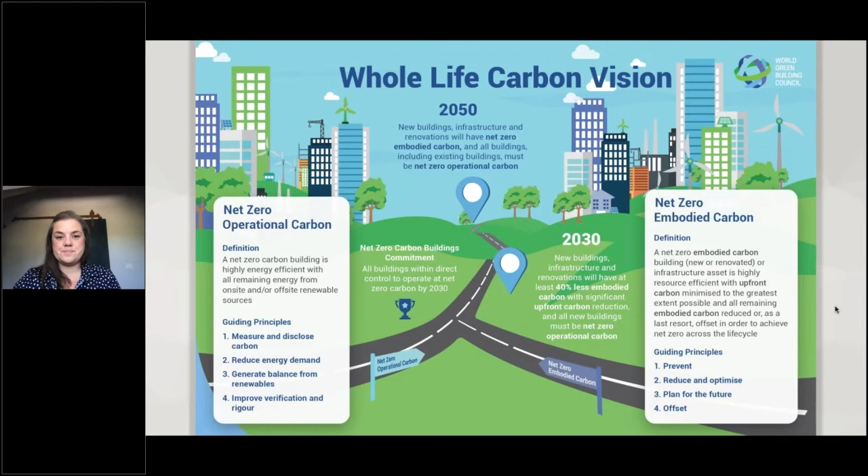Around the world, our green building councils are developing different tools, programs, and resources to help respond to this challenge, taking that framework and its guiding principles and vision and applying it in a way that's relevant to a particular market context in terms of the types of initiatives, metrics, target areas, and terminology used.

For example, in the Netherlands there's this concept of Paris Proof, where organizations can ensure their buildings are fit for purpose, future-proofed against future climate scenarios in line with the Paris Agreement reduction targets. There's also LEED Zero from the US Green Building Council, which recognizes a balance of net zero in energy and carbon.

In Singapore, where it's really difficult to achieve all your renewable energy needs on site through solar panels, or procure off-site due to lack of availability and land space, they're approaching it through a super low energy concept, which means reducing the amount of energy consumed by the building as much as possible.

In other markets, they're also taking a whole life carbon approach, such as the UK GBC with their net zero carbon buildings framework, ensuring targets and standards for reducing embodied carbon. Similarly, DGNB from Germany has a climate positive certification program, which requires buildings to set a roadmap for achieving net zero for all associated emissions.

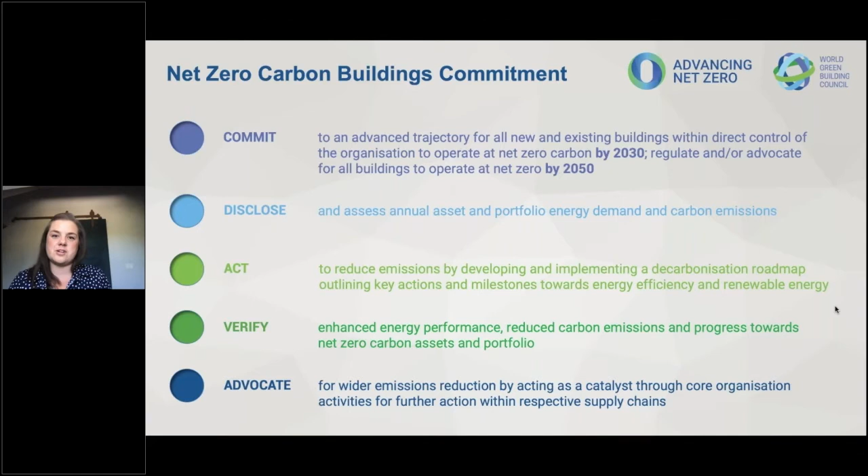We currently have 100 signatories to the commitment, with more being announced this week, and we have detailed guidance available on our website for those interested in signing up. Each organisation and government that signs up creates an action plan setting out the intention to achieve the different components I just set out. We use the Green Building Council network, their rating tools and guidance documents, to help and support signatories in achieving their commitment goals.

I've mentioned embodied carbon briefly, and I want to carry on with a quick mention about why that's important. Globally, buildings are responsible for 39% of carbon emissions, broken into 28% for building operations, the use of buildings, and 11% from the construction industry for the materials and construction processes in creating and maintaining those buildings.

Building operations are split into the residential and commercial sector, and also into direct emissions created on site through on-site combustion, for example, and indirect emissions from use of electricity from the grid.

That 11% from the construction industry is actually fairly small when considered against the total amount of emissions from the concrete, steel, and aluminium sectors, which are over 22.7% of emissions on their own. That's broken down into roughly 11% for concrete, 10% for steel, and 1.5% for aluminium.

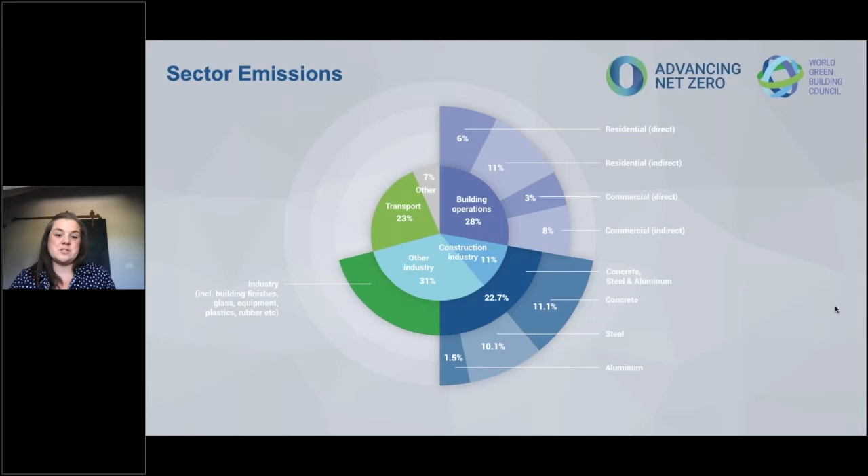Therefore, if we, as the building and construction sector, an enormous procurer of these materials, can help create demand for low carbon alternatives, then we can have a much greater impact on global carbon emissions than just the 39% our sector is already responsible for. We will be introducing a whole life carbon commitment pathway to the commitment later this year.

This week we're celebrating World Green Building Week with its theme, Act on Climate, through advancing net zero buildings. We're highlighting the action already being taken by businesses and governments around the world in advancing net zero buildings, and why net zero buildings are important for communities, for the planet, and for economies.

It is time to tackle the climate crisis, to rise to the challenge, to overcome the hurdles for a more resilient tomorrow, and net zero buildings are the solution. So this World Green Building Week, learn how we can take action across our sector, share the message about net zero buildings.

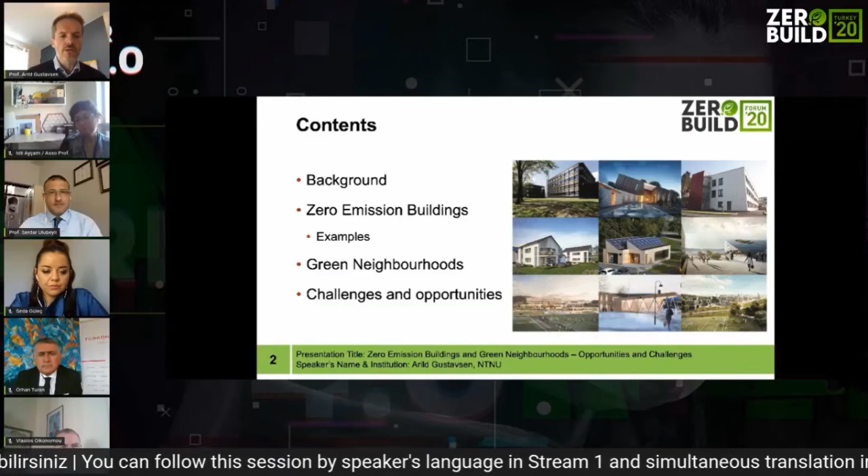The contents of my presentation: first I will give a bit of background, which partly has already been introduced. I will talk about the work we have been doing on zero emission buildings and give a couple of examples, then touch upon green neighborhood concepts and give some examples on those, and then end with some thoughts on challenges and opportunities.

So why do we work on zero emission buildings and zero emission neighborhoods? As presented earlier, we know that the buildings and building construction sectors combined are responsible for 36% of the global final energy consumption and nearly 40% of the total direct and indirect CO2 emissions. The emission numbers vary a bit from source to source, but if you include upstream energy and material production, it can be quite a substantial number anyway.

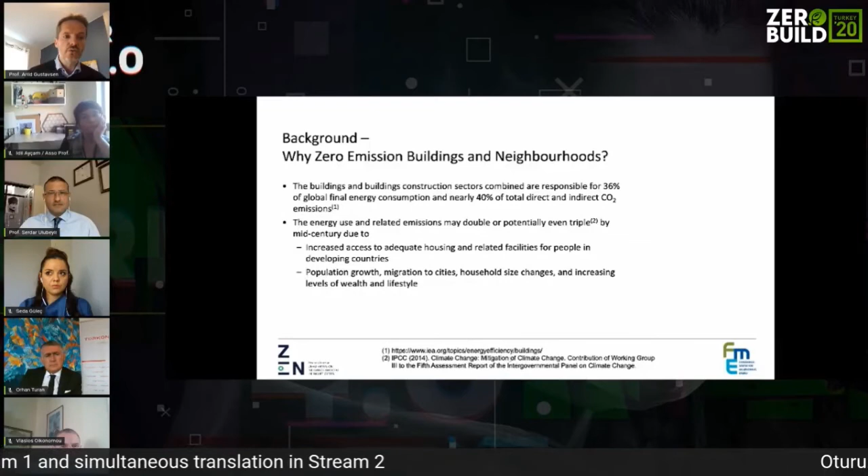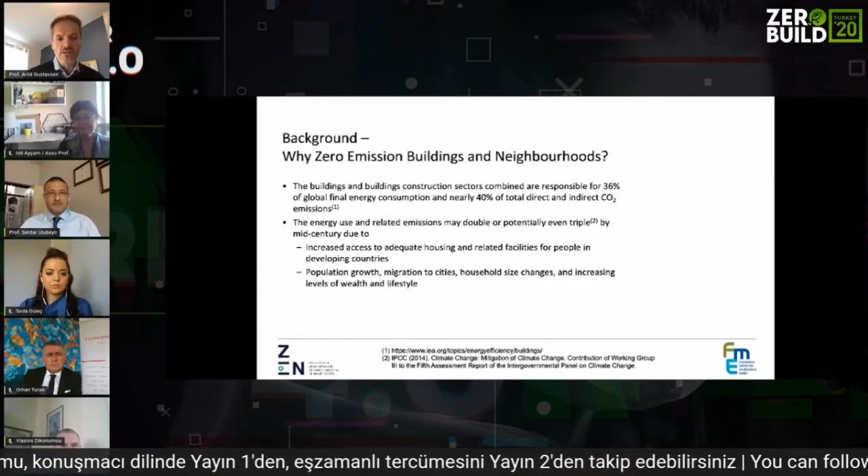We know the current numbers, but looking at the future, the energy use and related emissions may double or potentially even triple by mid-century. This is due to increased access to adequate housing and related facilities for people in developing countries, due to population growth, migration to cities, household size changes, and increasing levels of wealth and lifestyles.

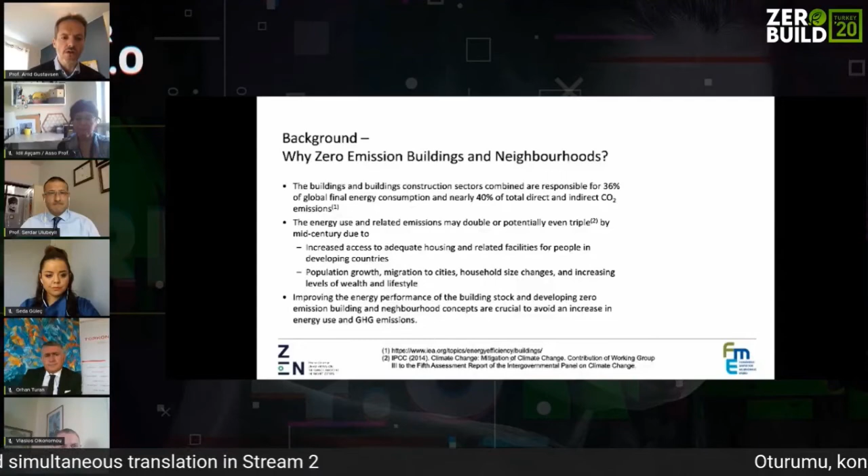So improving the energy performance of the building stock and developing zero-emission building concepts and zero-emission neighborhood concepts are very important to avoid an increase in energy use and greenhouse gas emissions. This, of course, also relates a lot to the UN sustainability goals, and I think several of those are relevant in this regard.

For instance, affordable and clean energy for all. When you aim for a zero energy concept and zero emission concept, we know that we need to invest in renewable energy production, usually close to the building or on the building site or on the building itself.

We also touch upon sustainable cities and communities. A lot of the buildings we have are in cities, and there will also be an increase in the number of people living in cities. We need to increase the number of built houses in a sustainable way.

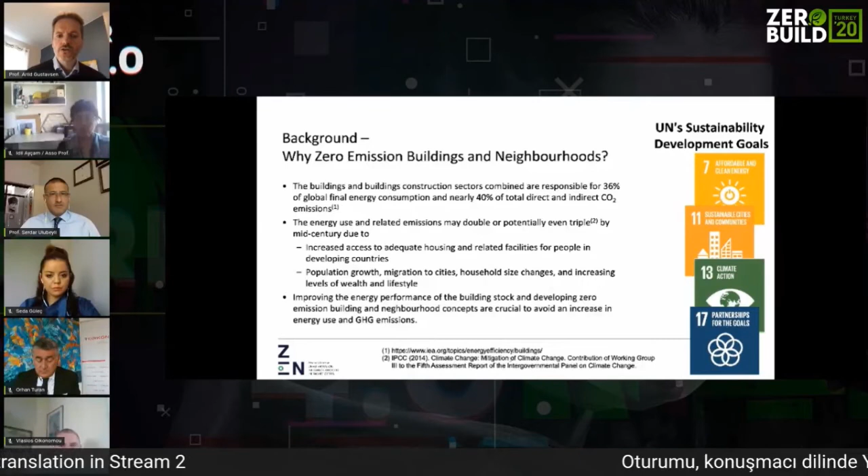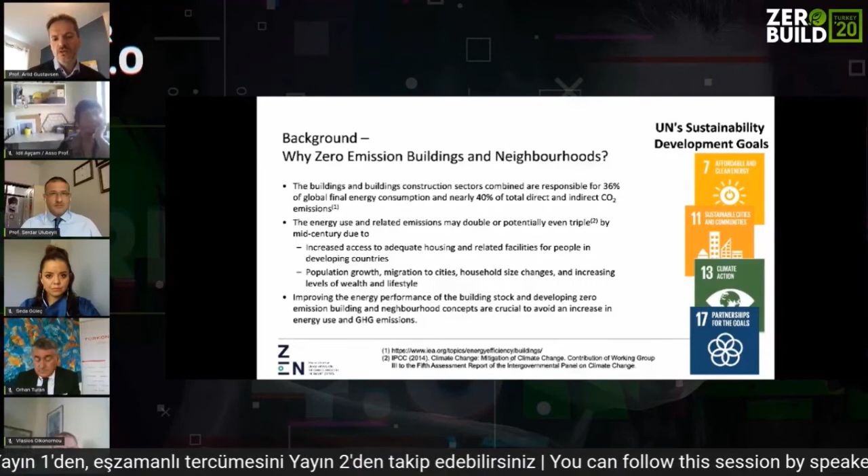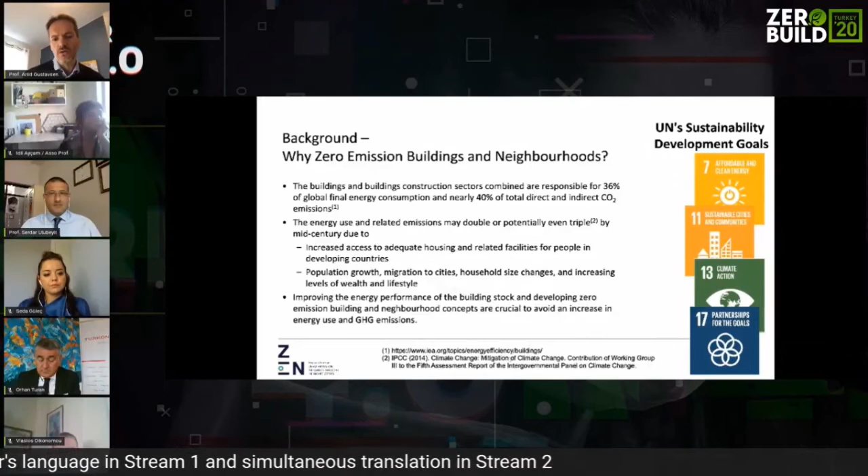And of course, climate action, this connection is very clear, and also partnerships for the goals. Making one building includes partnerships across different disciplines, but making zero-emission neighborhoods or a sustainable city touches upon very many areas like municipalities, consultants, the building sector, the energy sectors. You need collaboration for all these actors to make sure we arrive at this wanted environmental ambition.

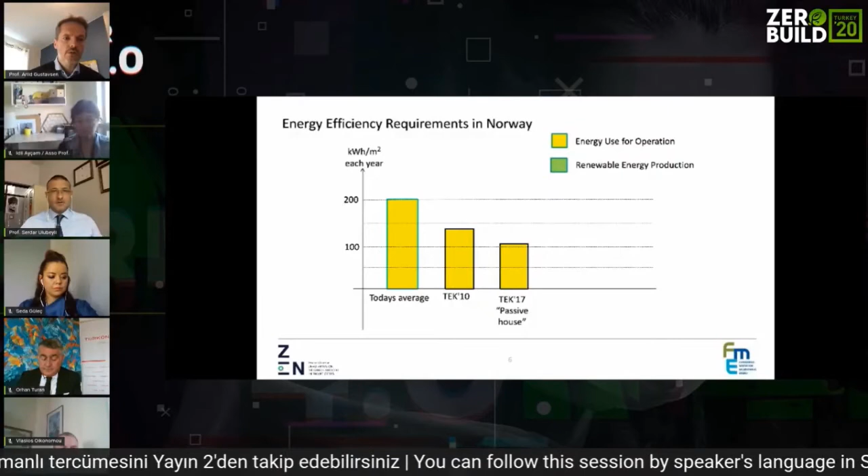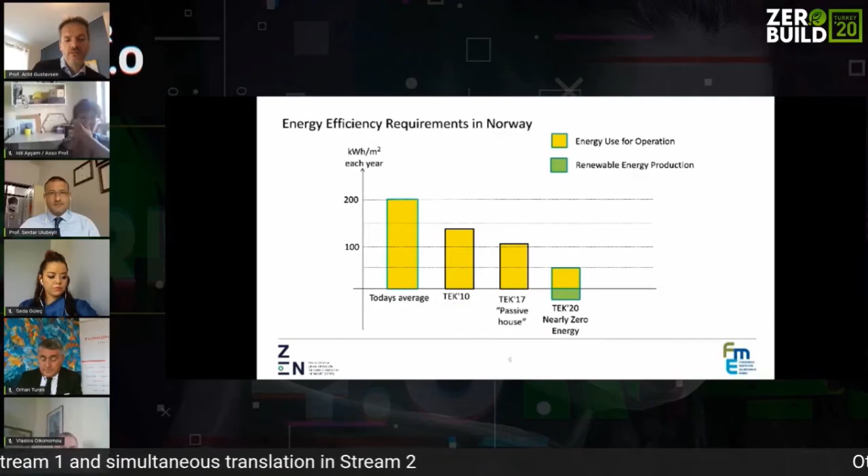Looking at what is going on in Norway, we see that today's average energy use in buildings is around 200 kilowatt hours per square meter each year. In the technical regulation in 2010, it aimed for below 150 kilowatt hours per square meter per year, and in 2017 we introduced what is called passive house level, close to 100 kilowatt hours per square meter per year. In 2020, which is now coming to an end soon, we will have the nearly zero energy ambition level pointed to by the European Commission.

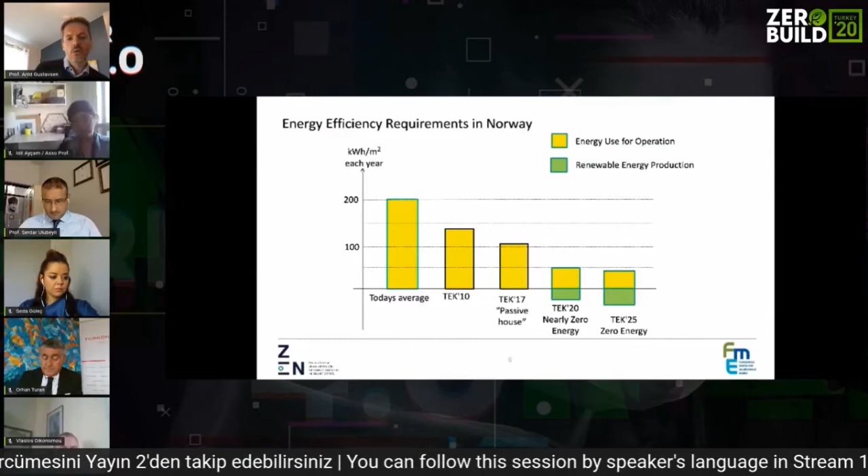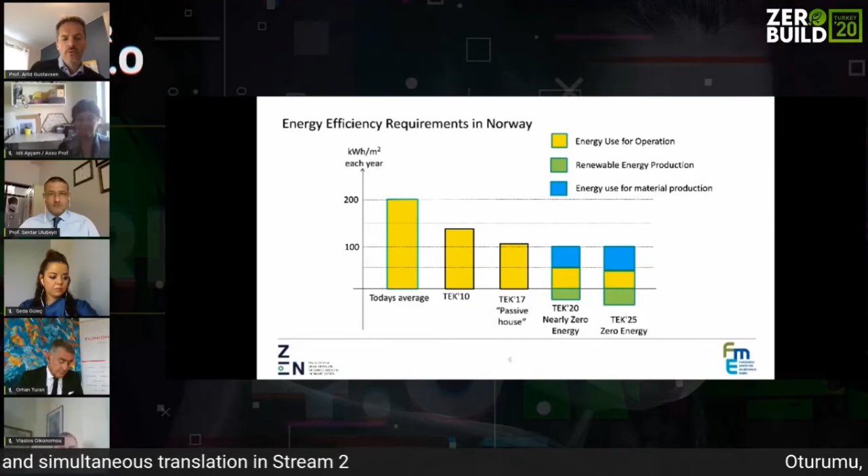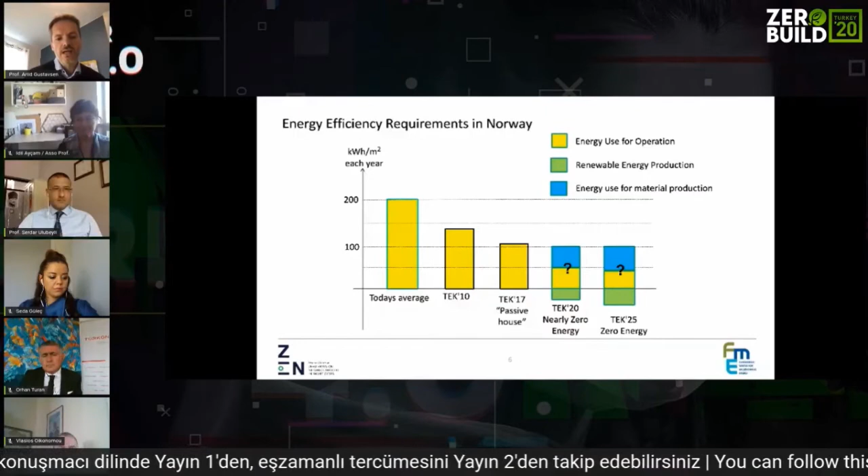Maybe in 2025, we might end up with a zero energy ambition level. But so far, most of these requirements, at least in Norway, have been on the energy use and usually only on the operational energy use. If you look at the energy use going into making the materials, the picture might be a bit different. Still, at least in Norway, it remains to be seen what exactly this definition will be, also for this year, actually.

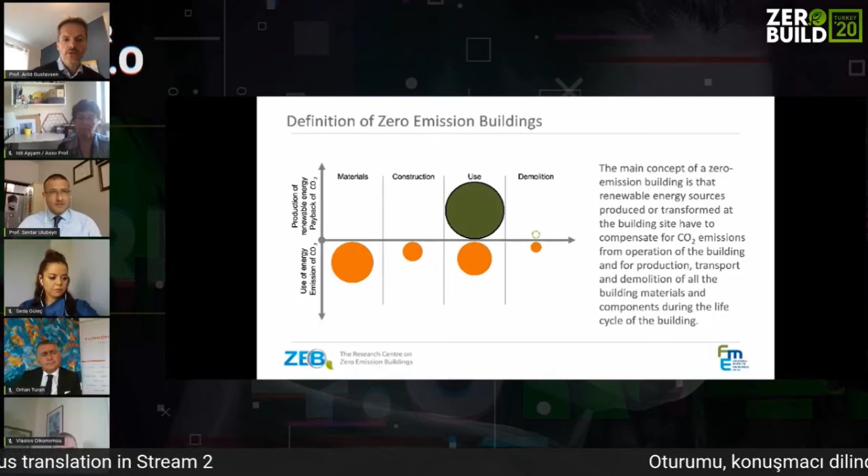Since we also think that the embodied emissions, the energy use, and the emissions going into making the materials and constructing the building are just as important, we have been working on the zero-emission building concept. The main concept is that renewable energy sources produced or transformed at the building site have to compensate for CO2 emissions from operation of the building and for production, transport, and demolition of all the building materials and components during the life cycle. So we need renewable energy production to compensate for all the emissions.

That then means emissions related to materials, construction, the use phase, and also the demolition phase. For energy efficient buildings with renewable energy production integrated, like PV, we often see that the material emissions are of the same magnitude as the operational emissions.

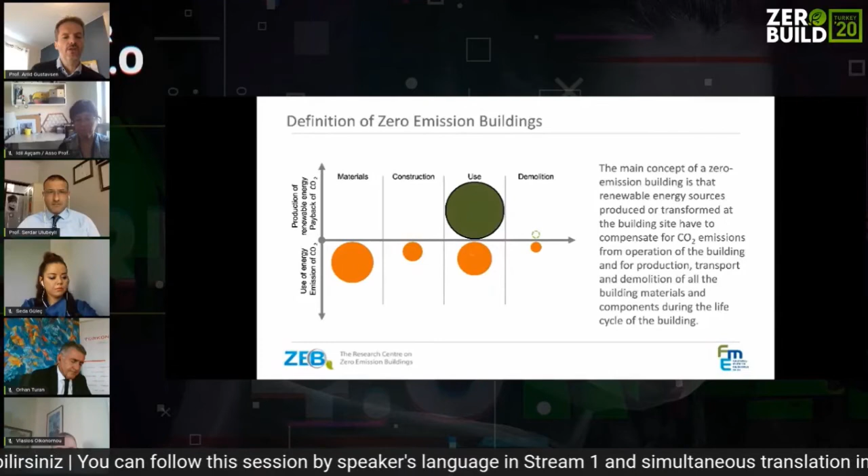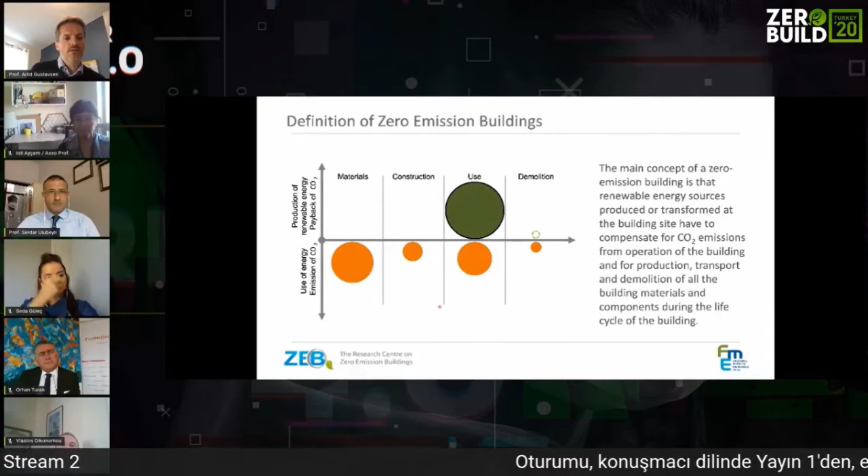Material energy use is on the same magnitude as the energy used for operation. So looking at the whole life cycle becomes really important, to make sure we also work on the material side and the construction side, in addition to the operational side.

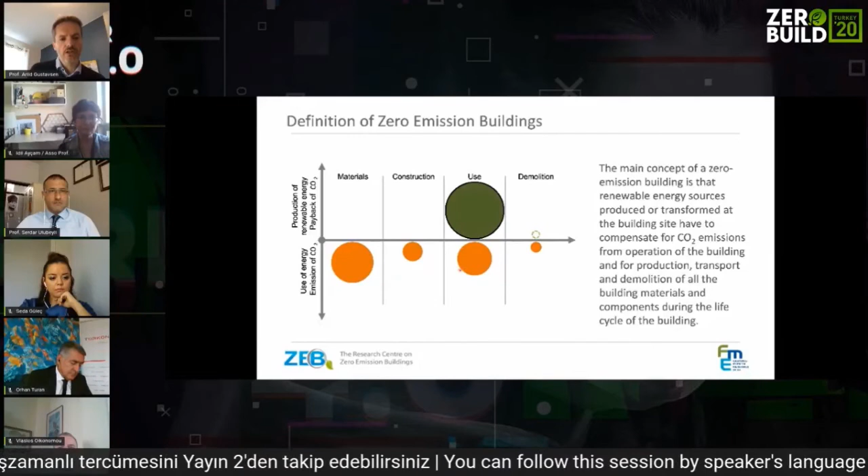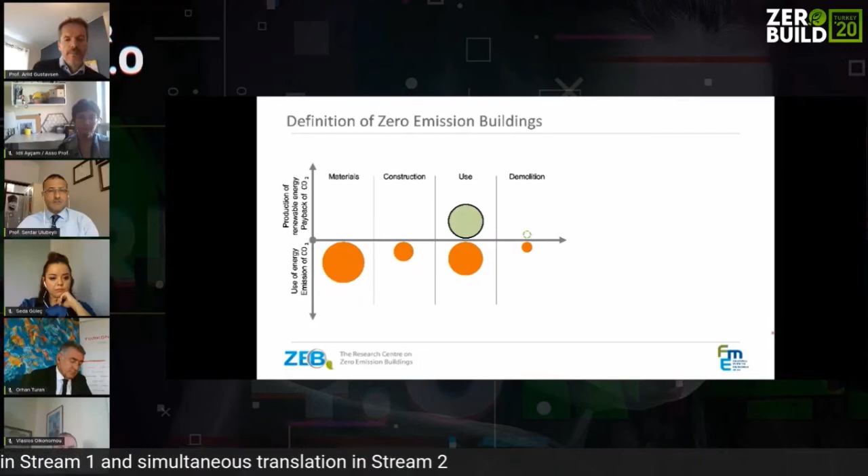So we have developed different ambition levels. This is showing one of those. We have different ambition levels depending on how much renewable energy production we can have on the building. What is shown here is the zero emission building in operation, where we have renewable energy production of the same magnitude as we need for operation of the building.

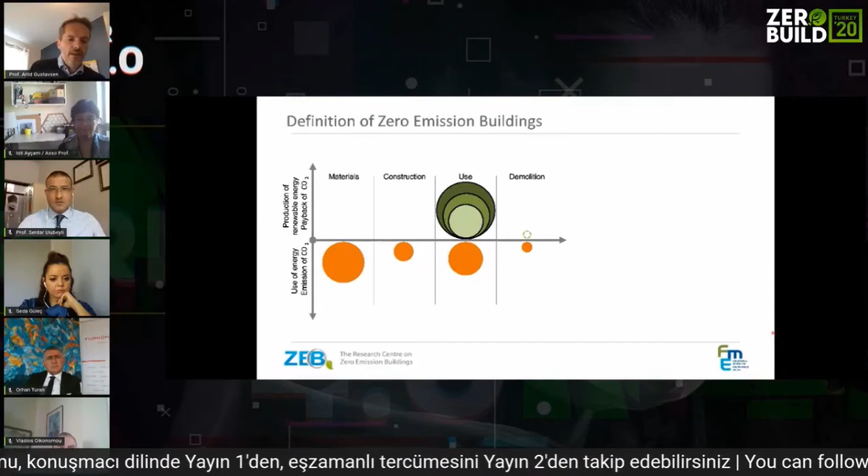If we are able to include more renewable energy production on the building or on the building site, we can have a more ambitious requirement for the building. The ultimate aim is to have renewable energy production compensating for all the emissions related to the whole life cycle, and also taking into account maintenance of the building.

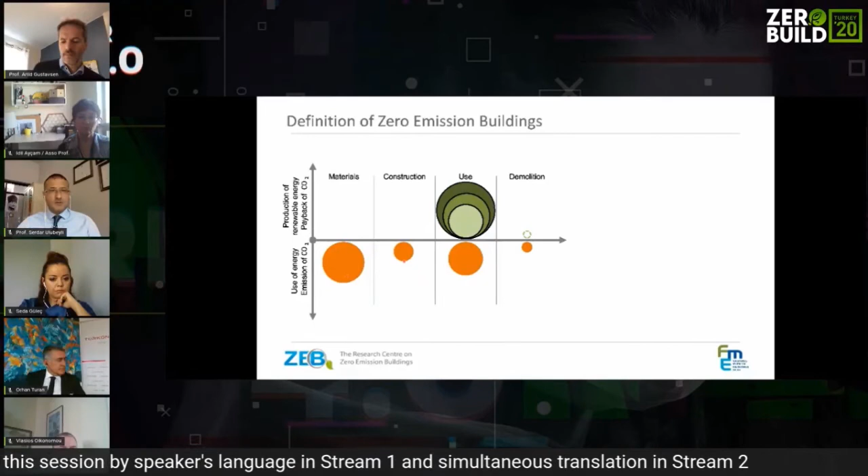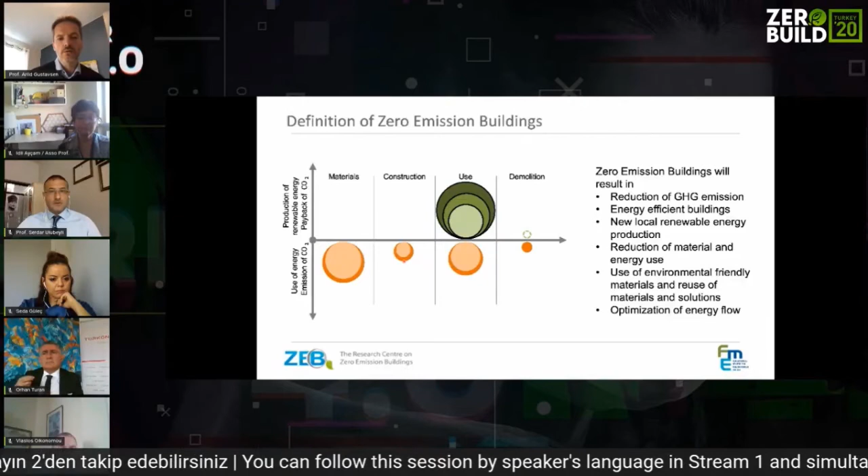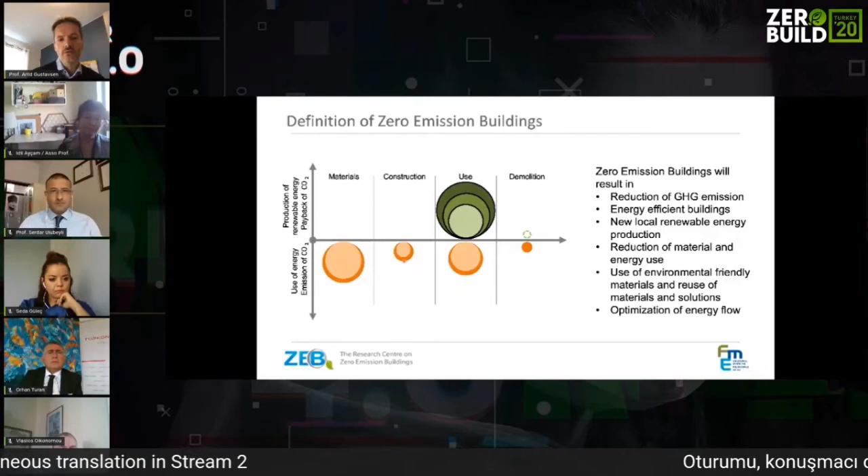So if you use this zero emission building definition, we will have a reduction of greenhouse gas emissions. We will have energy efficient buildings. We will have new local renewable energy production on the buildings or nearby the buildings. We will have reduction of material and energy use, and also promote the use of environmentally friendly materials and the reuse of materials and solutions, and optimization of energy flows.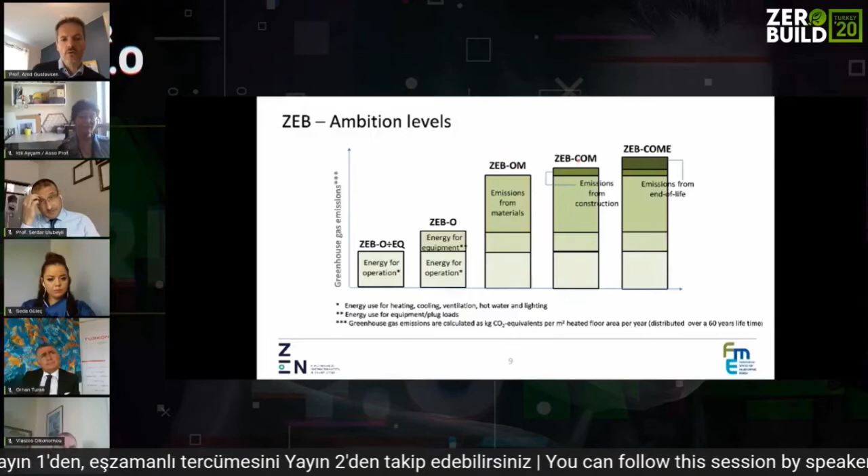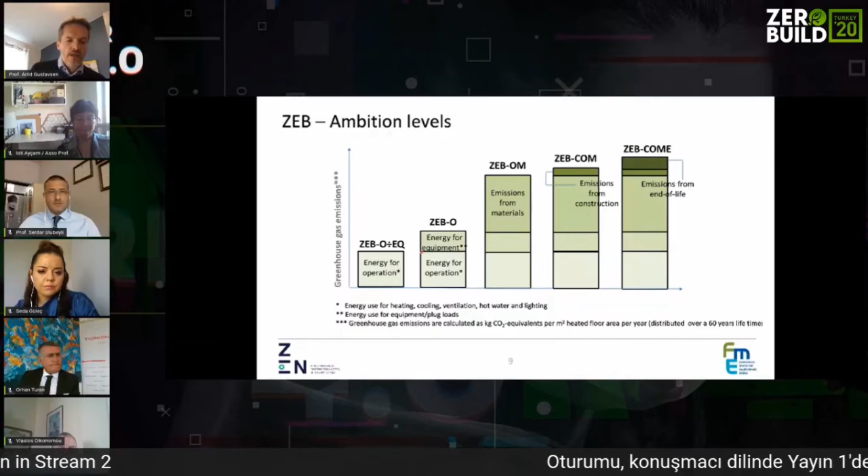COM is zero emission buildings with construction, operation, and materials. COME is zero emission buildings with construction, operation, materials, and end of life. The easiest or lowest level is what we call zero emission building in operation, but without the plug loads or the user equipment.

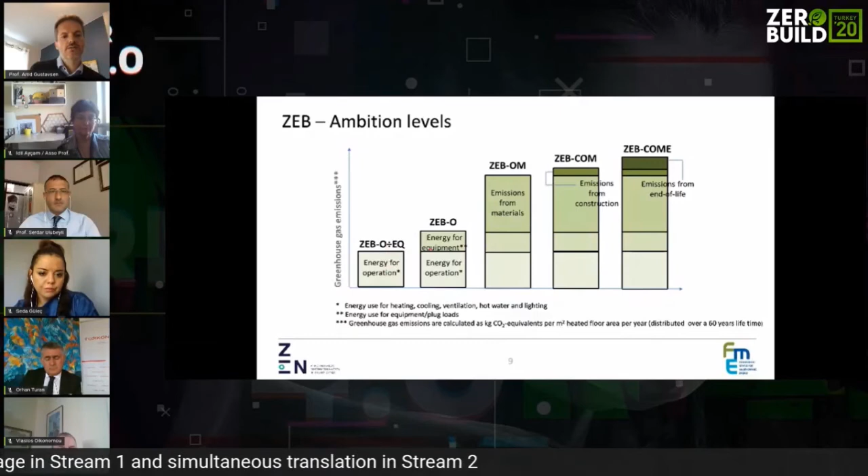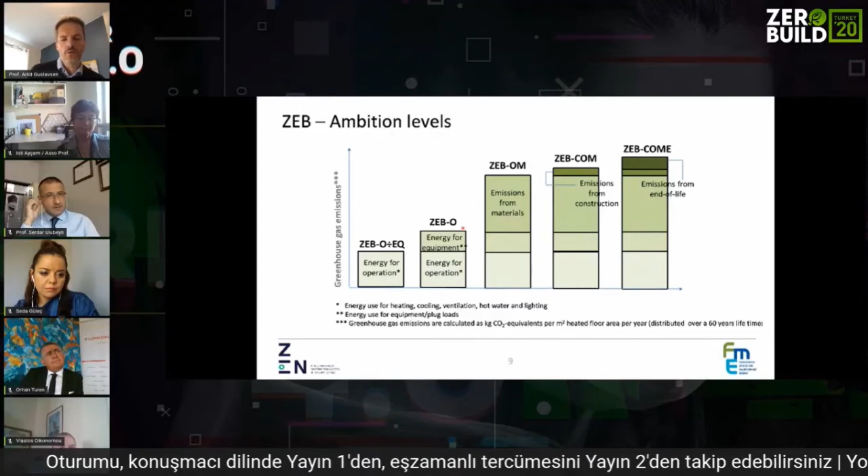This way of defining zero emission buildings also helps the construction industry improve the energy requirements or the environmental requirements, as they learn more about how to plan a building like a zero emission building.

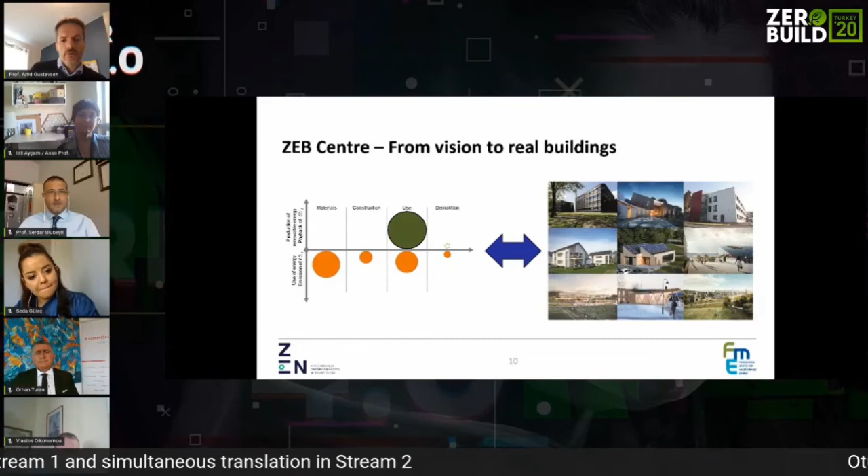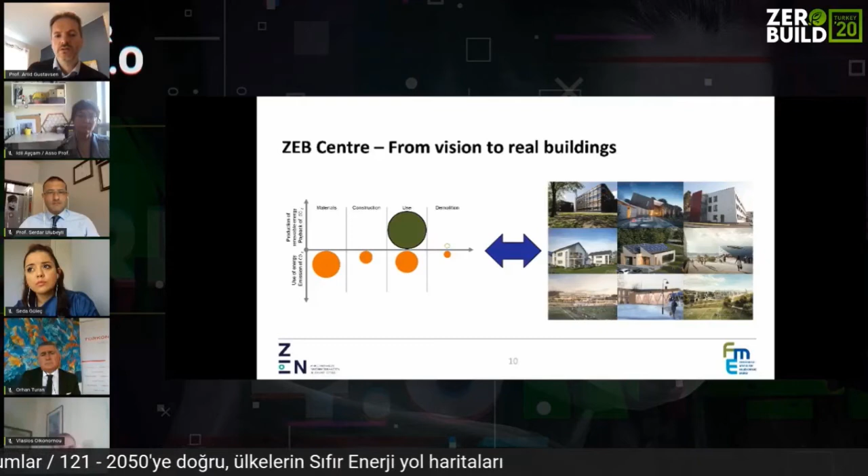And this is not only theory, it's also applied in real demonstration projects. Right now we have been working with the industry and developed 8 projects, shown here. It's office buildings, residential buildings, and also school buildings. I will give 2 examples.

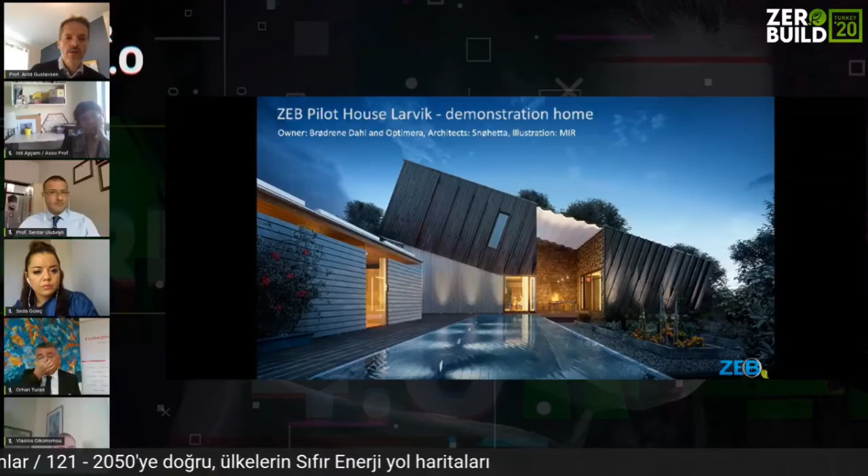The first one being the zero emission building house in Larvik, south of Oslo in Norway. It's a demonstration building. The architect was Snøhetta, and the owners are a company dealing with technical systems for buildings.

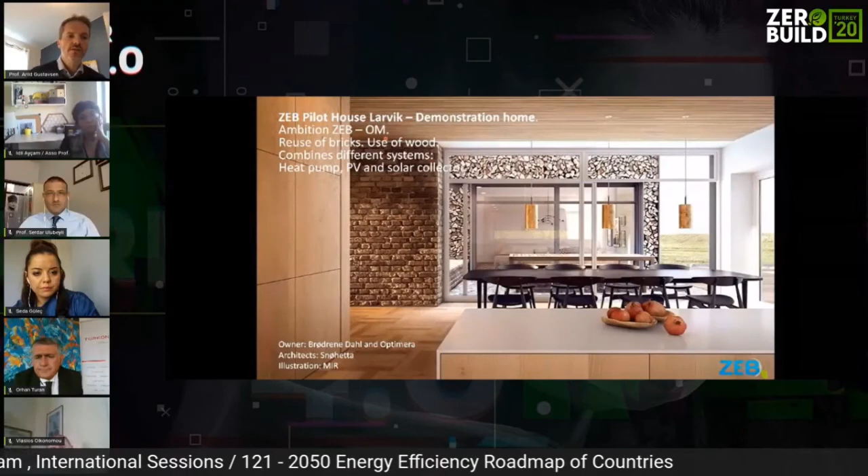If you look at the ambition level here, it is zero emission buildings including operation and materials. To obtain this ambition level, they have used a lot of wood. They have reused materials, for instance in this case the bricks, I will get back to that. In addition, they have combined different systems: heat pump, photovoltaics, and solar collectors.

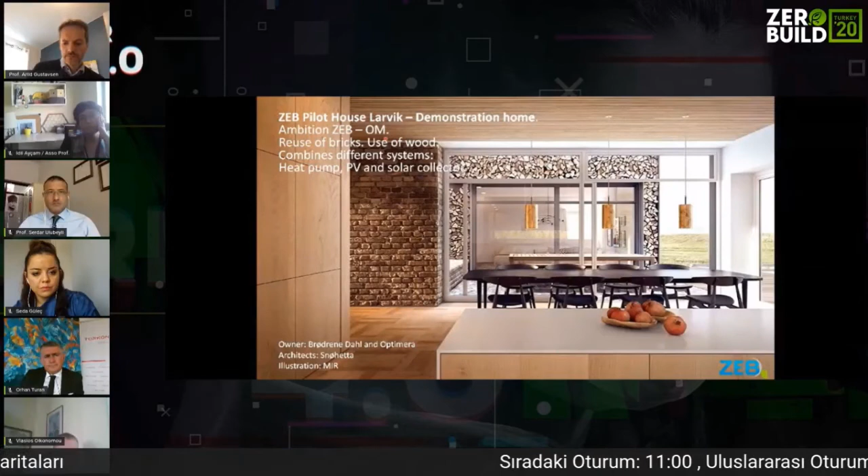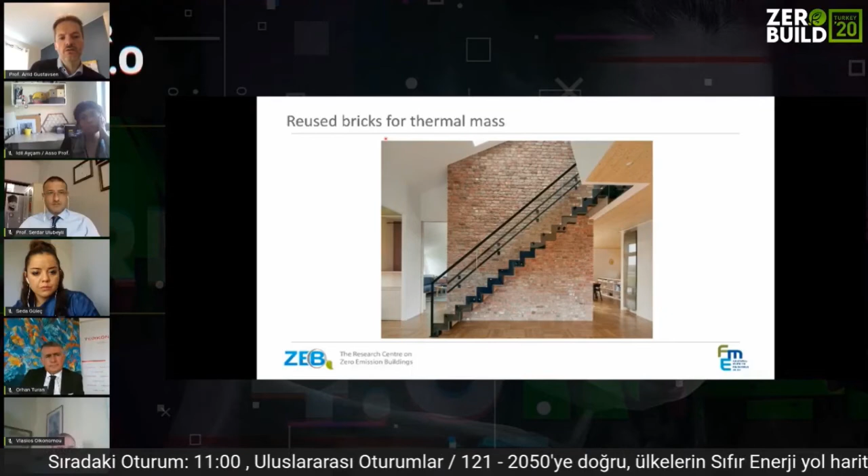For instance, the architect and the owner wanted to have thermal mass in the building. The first concept was with regular concrete, adding that to the core of the building. But then calculating and aiming for the zero emission building operation and material emission level, they found that this contributed too much to the material emissions. So then they looked at low carbon concrete as an alternative.

But in the end, they ended up using reused brick that was sourced from a barn nearby that was being taken down anyway. This way, focusing on emissions during the whole life cycle of the building, they managed to reduce the emissions to the environment.

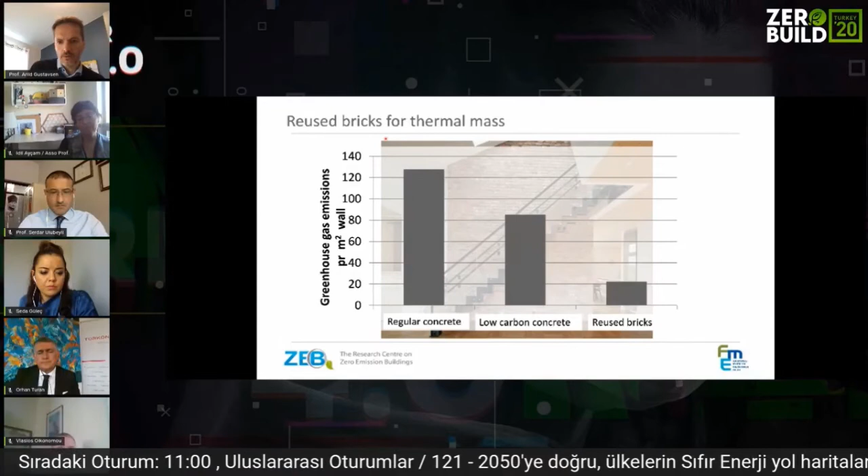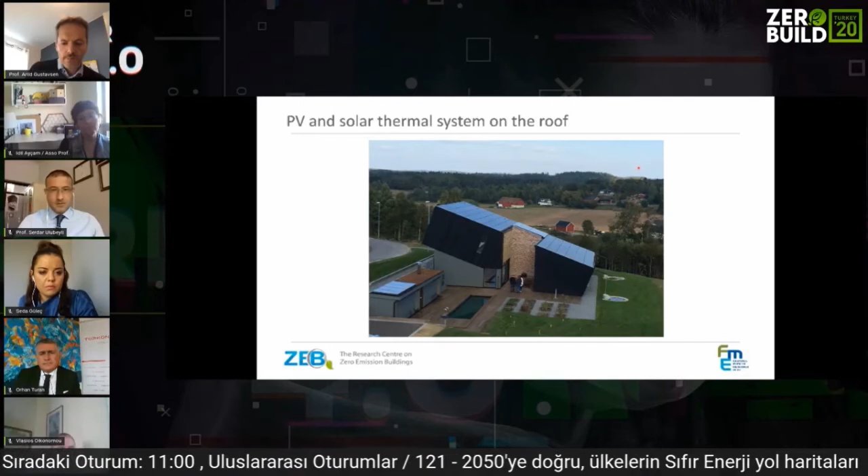At the end, we can look at the energy numbers. If this building was built according to the technical regulation in 2017, it would have used slightly above 100 kilowatt hours per square meter per year.

By using the zero emission building ambition, we see that they end up with the operational energy less than 50 kilowatt hour per square meter per year. And also we look at the renewable energy production.

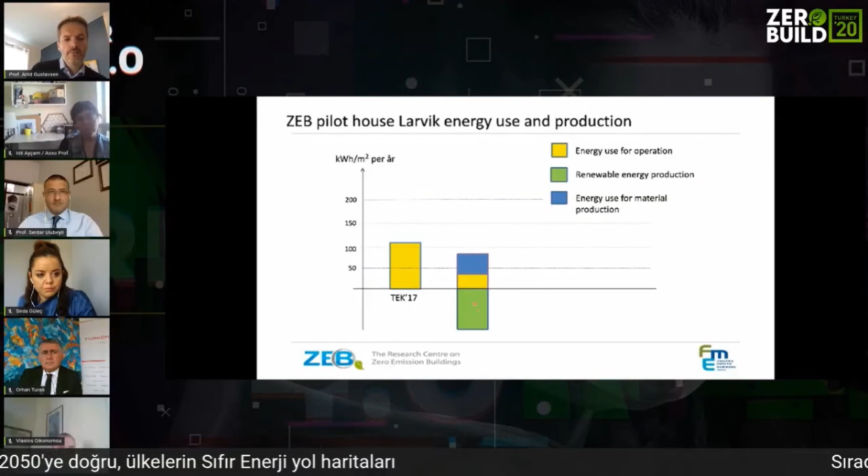If you compare this to both operation and the materials, we see that it is larger than the energy used for operation and for the materials. This needs to be like this because we have to compensate during the lifetime of the building. In the calculation procedure, we define the lifetime of the building, or the life cycle time, as 60 years.

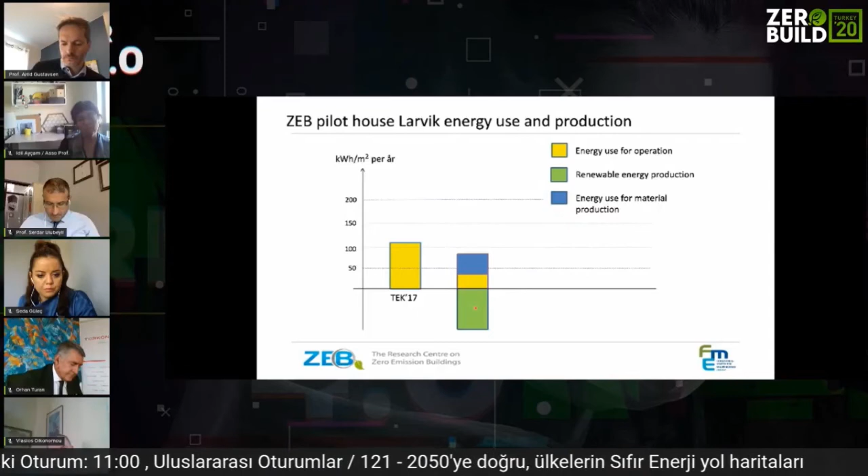Another building, this was a renovation project of an office building from 1980. It originally had an aluminum facade with a lot of glass.

After renovation, they ended up having more wood in the facade and burnt wood to take down the emissions, or take down the embodied emissions further. All in all, they here aimed for what they call zero emission building with operation and materials, with taking

out the user equipment. So here they used exposed concrete as thermal mass to limit the temperature fluctuations. They reused glass and concrete from the original building.

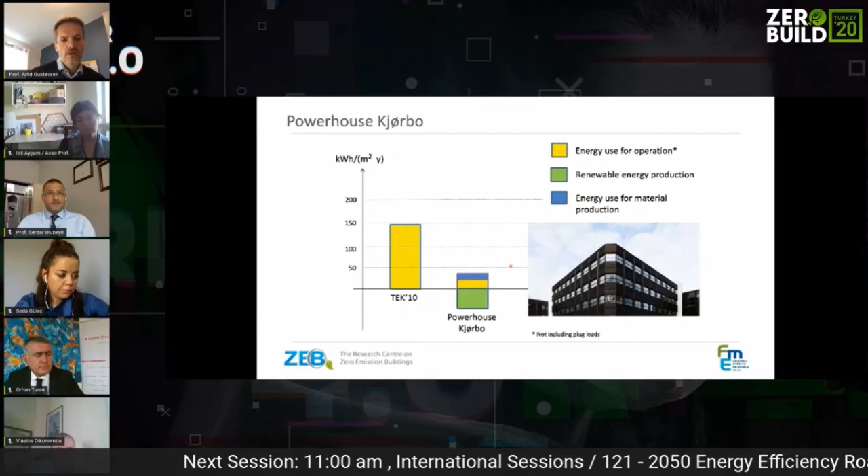They have a lot of photovoltaics on the roof, both on the roof of the building itself, but also on the part of the parking garage that belongs to the building. In this way, they're able to produce enough renewable energy to compensate for operation of the building and also for taking into account the materials.

That was two examples. Then I will show two slides showing what the result can be if we implement zero emission buildings in the technical regulations and look at scenarios towards the future.

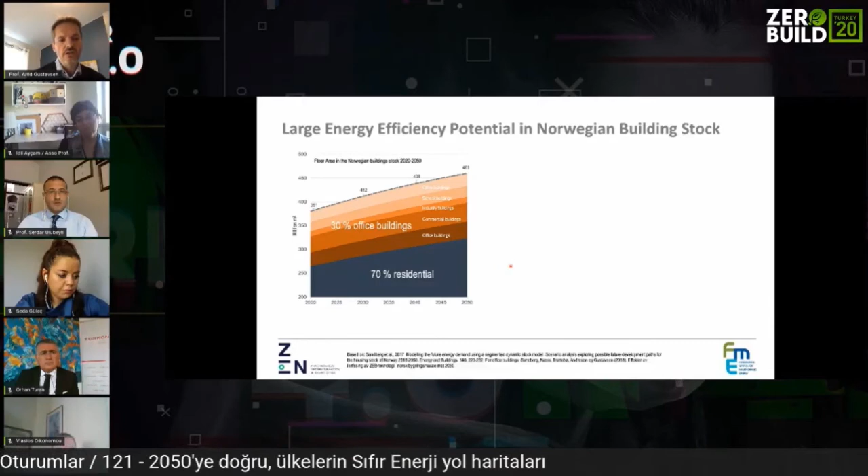This graph shows the built square meter floor area in the Norwegian building stock, starting at 2020 and looking into the future to 2050. We see that there will be an increase in the built area the next 30 years. And if you look at what this will do to the building stock, some of these buildings will be

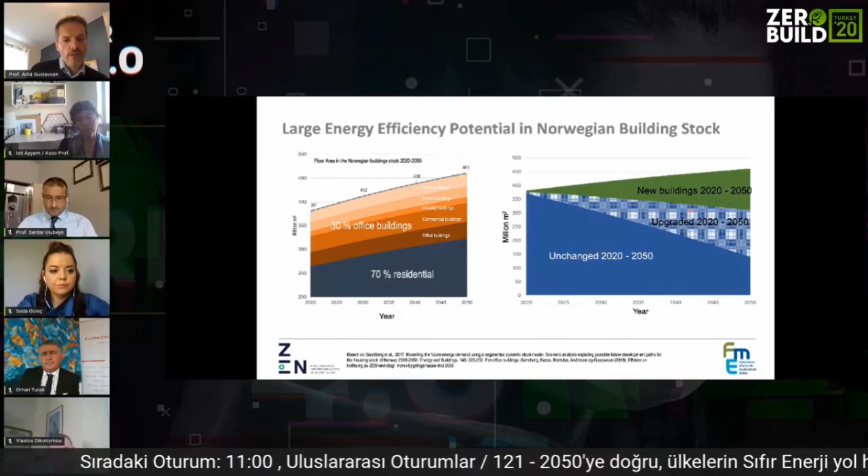unchanged because they are new or built quite recently. Some will be upgraded, and some will be new buildings built according to the technical regulation at the different future times. Then we can calculate the energy performance of the whole building stock into the future.

We did that by looking at three scenarios. On baseline scenarios, using the current energy performance requirement and improving them slightly. We also looked at a ZEB scenario where we implemented some of these zero emission building concepts into the future energy requirements, and also looked at a really ambitious scenario.

And if we see at the results, we can see that energy use in the Norwegian building stock can be almost 40 terawatt hours less in 2050 compared to 2020.

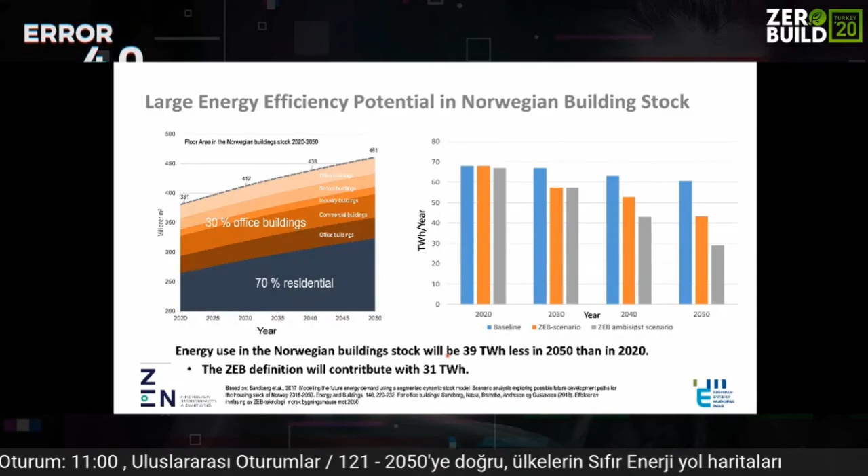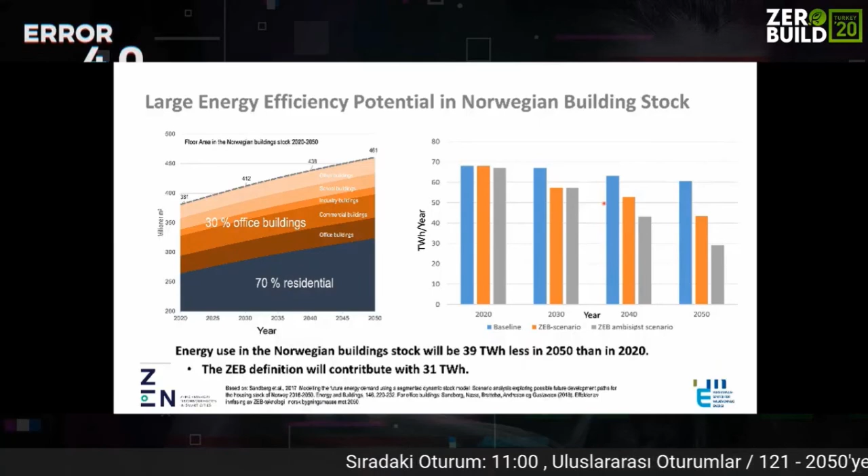And the ZEB definition itself that we have proposed can contribute with 31 of those 39. There is a big energy efficiency potential and also a potential for implementing renewable energy technologies in the building stock.

This can, even with an increasing population and increasing built floor area, we can have a reduction, and a substantial reduction. This freed up energy can be used in other sectors like the transport sector, if we are electrifying the transport sector, moving from fossil fuel to electricity. Or it can also be used in other areas.

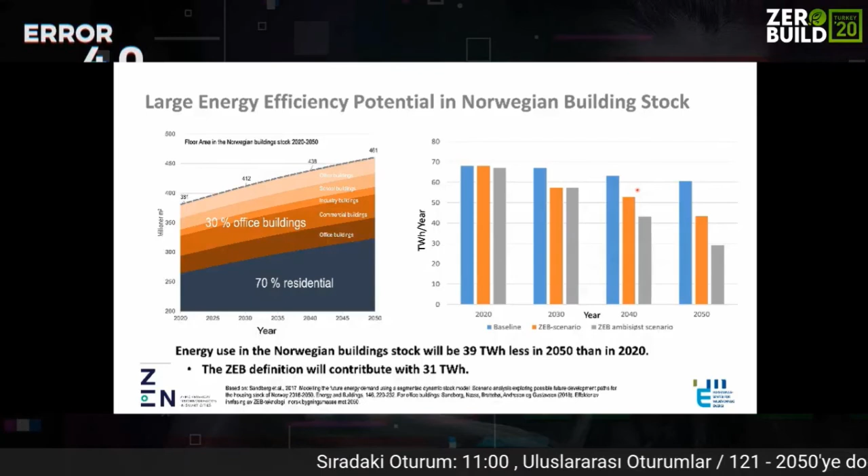And then I changed to the neighborhood scale. I think I have 2 or 3 minutes left.

So recently, in 2017, we started to work on the neighborhood scale. That is because we see that working on one individual building might not be optimal. It's better to look at a group of buildings and to look at synergies. Today, we usually cool one building while we can heat the neighboring building. So the best thing would be to use the surplus of heat in the building where you need this heat.

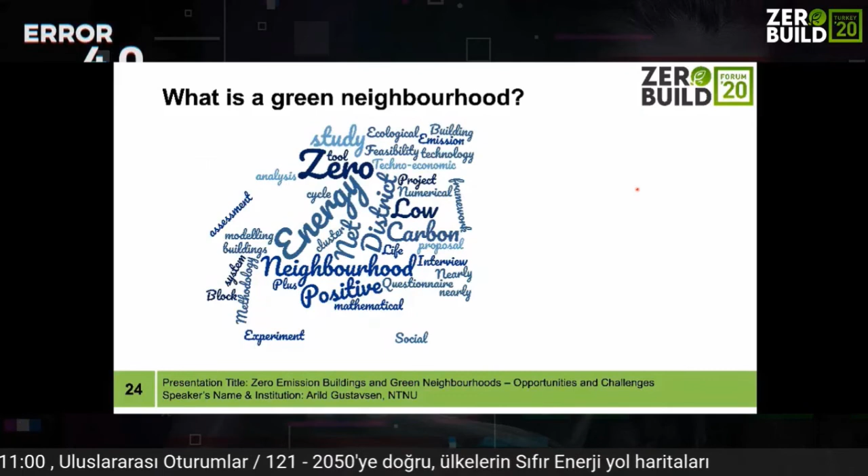Of course, I'll just show briefly 3 examples of how this can be defined. One is coming out from the Zero Emission Neighborhoods Center, where we have developed this research center definition.

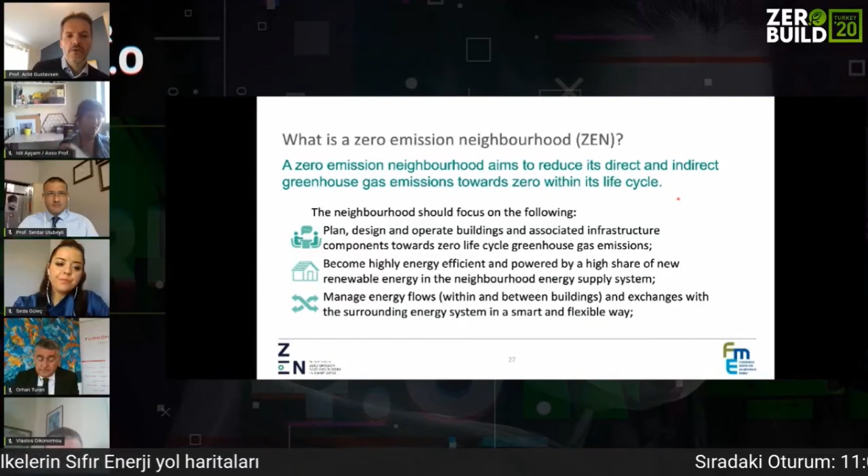Instead of having a zero emission building ambition building by building, we have an ambition of having a zero emission neighborhood. We look at the direct and indirect greenhouse gas emissions throughout the life cycle of the building, aiming for zero life cycle greenhouse gas emissions.

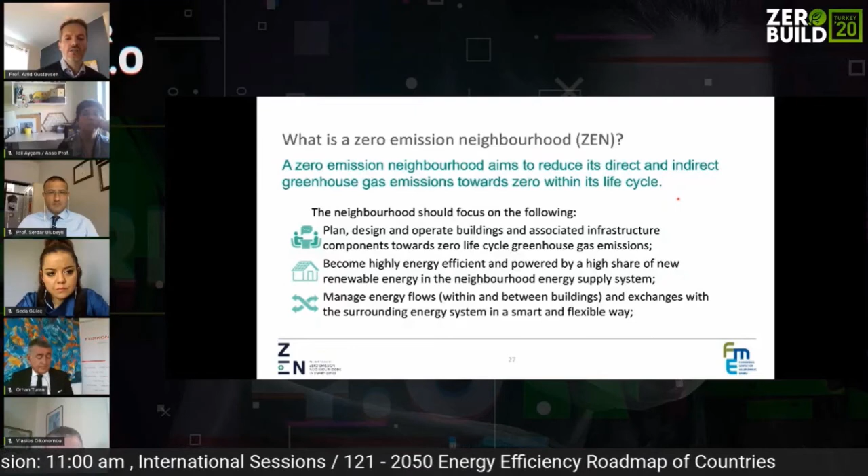The neighborhood should become energy efficient and powered by a high share of new renewable energy, through a neighborhood energy supply system. We need to manage the energy flows and exchange energy with the surrounding system in a smart and flexible way, and promote sustainable transport patterns and smart mobility systems.

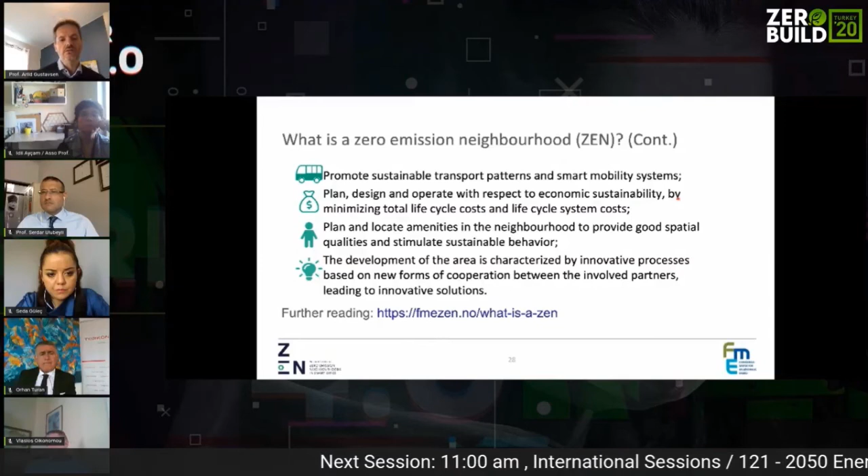Further, we should plan, design, and operate with respect to economic sustainability, and locate amenities in the neighborhood to provide good spatial qualities and stimulate sustainable behavior. We need to have the users, or the citizens of these neighborhoods, with us, and we should also look at innovative processes as part of this.

So we're now testing out this definition in several areas in Norway, working with municipalities and property developers. I also have two other examples, one connecting to an EU project.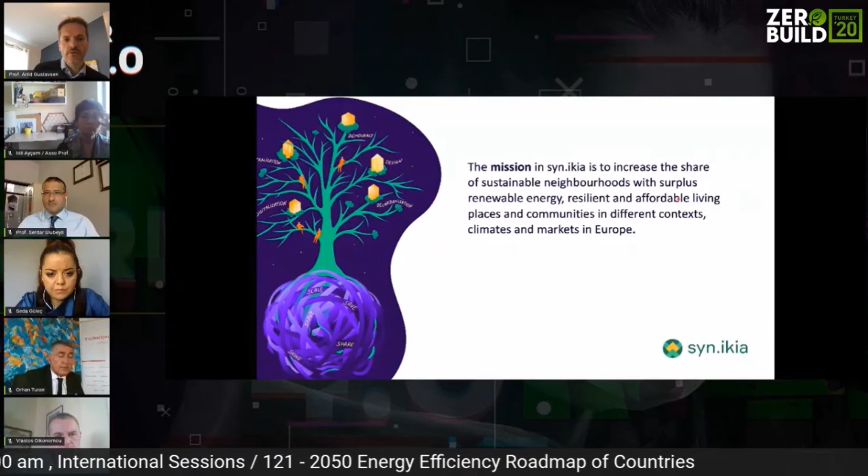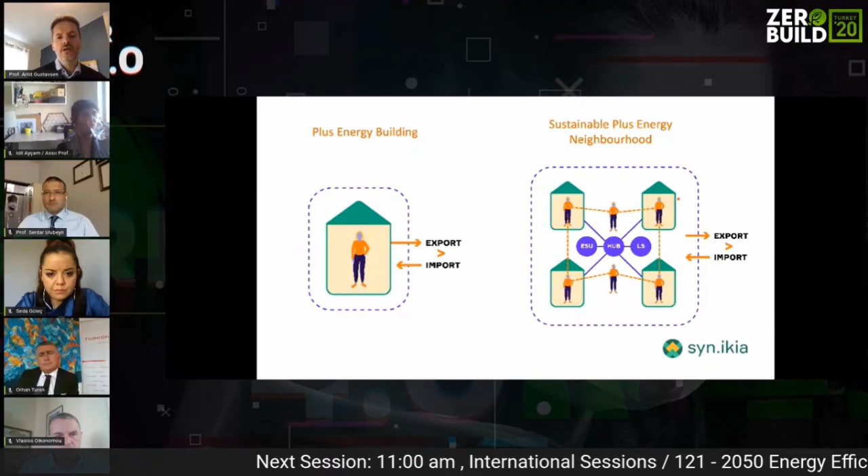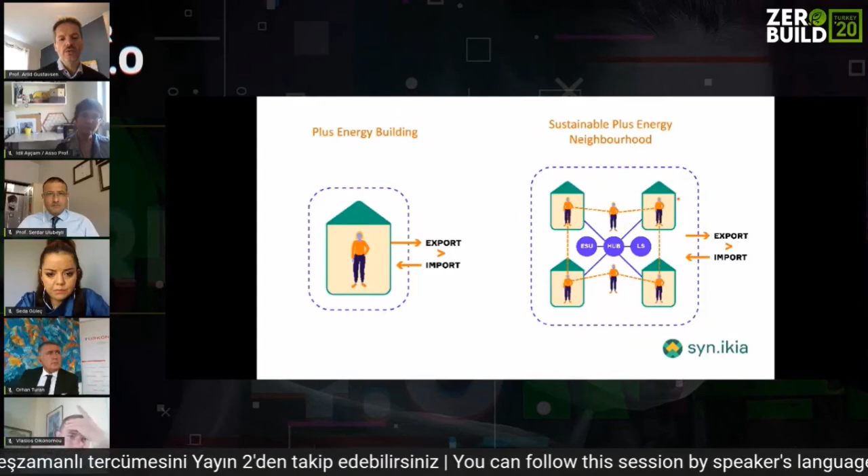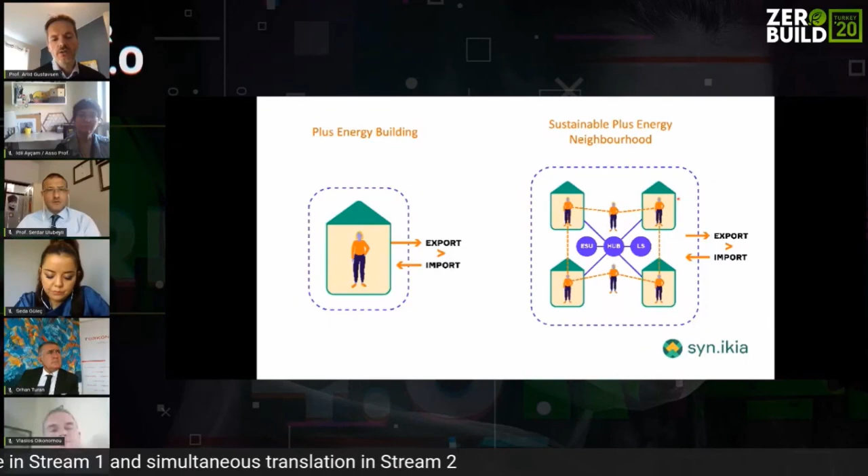Here the main mission is to increase the share of sustainable neighborhoods with surplus renewable energy. The focus is on energy, but instead of looking at the individual building, we look at the neighborhood scale, with neighborhood storage systems or neighborhood energy supply units, and exchange of energy and control of energy use among the buildings. The export of energy then needs to be larger than the import to obtain the ambition level.

This project is also working towards real demonstration cases, one in Norway, one in the Netherlands, one in Spain, and one in Austria.

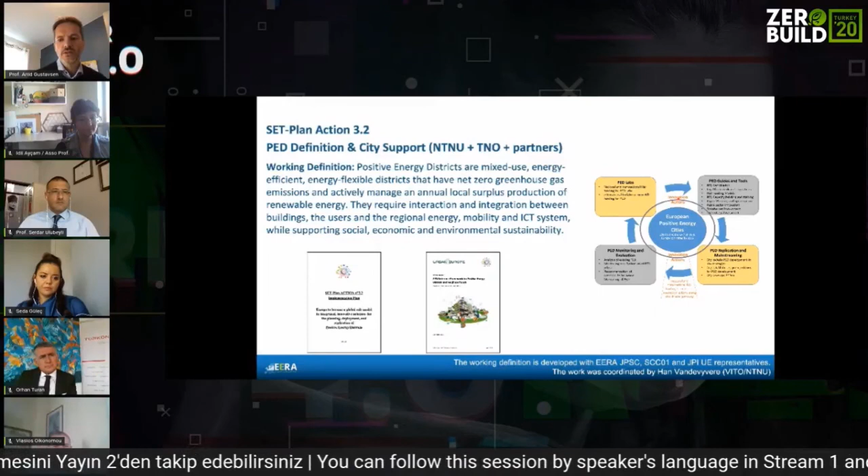Finally, one example comes from the Strategic Energy Technology Plan, one of the topics covered there being smart cities and communities. The aim is to support planning, deployment, and replication of 100 positive energy districts by 2025.

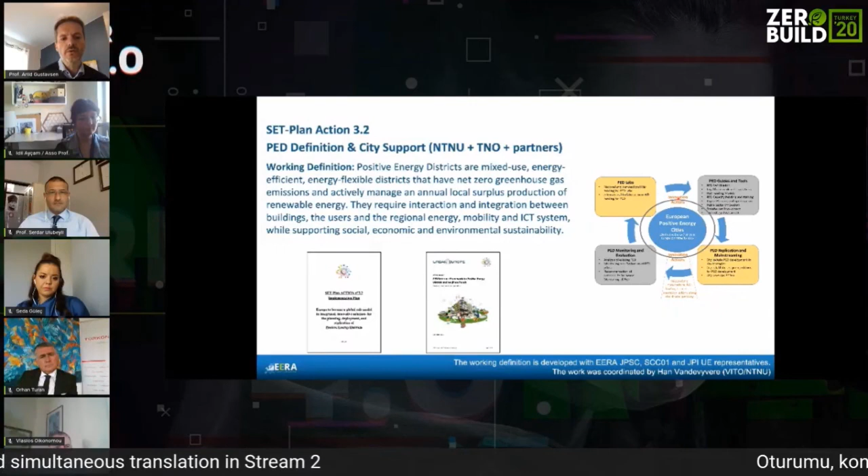Looking at the details here, the definition touches upon several of the same topics as we saw for the Zero Emission Neighborhood Research Center: mobility, energy, renewable energy, smart controls, and supporting social, economic, and environmental sustainability.

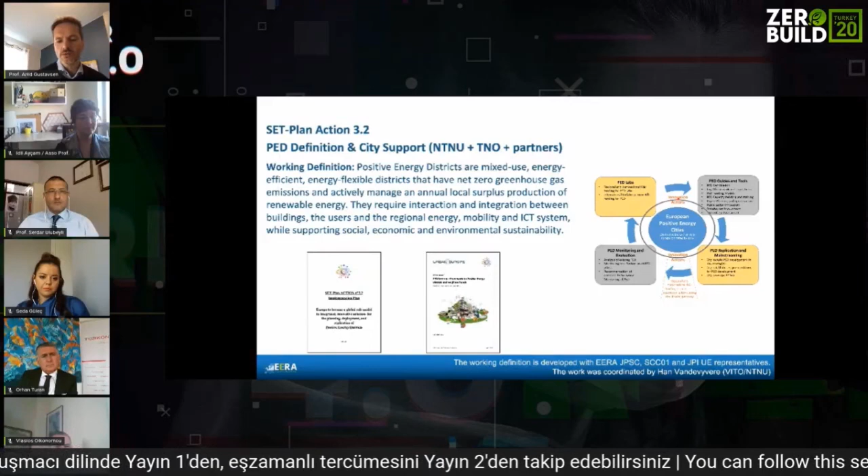I think I almost used my time. Final slides. But there are, of course, several challenges when realizing green neighborhoods. We are working with different parties in the neighborhood, for instance owners and developers, and these actors will have different environmental ambitions, so this is a challenge.

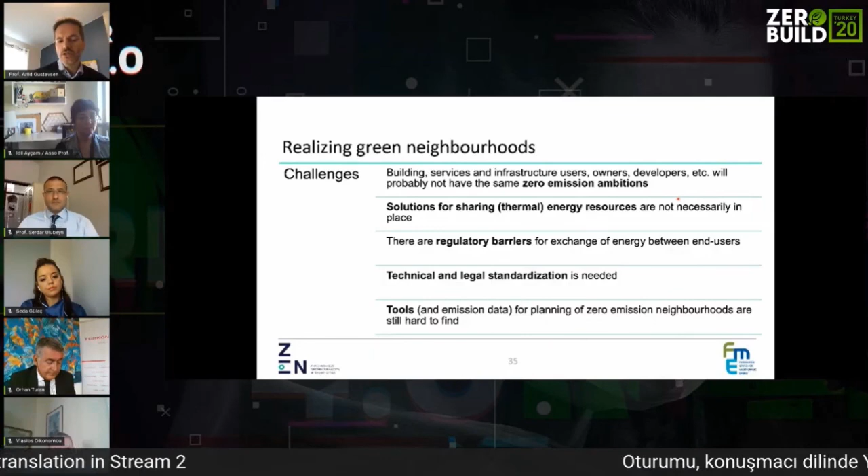Also, there are not systems in place for sharing energy sources. Electricity you can easily share as long as the policy measures are in place, but thermal energy is not that easy if it's not there from before.

There are also a lot of regulatory barriers in place, and we see that even in Norway for exchange of energy between end users. Technical and legal standardization is also needed to make this happen.

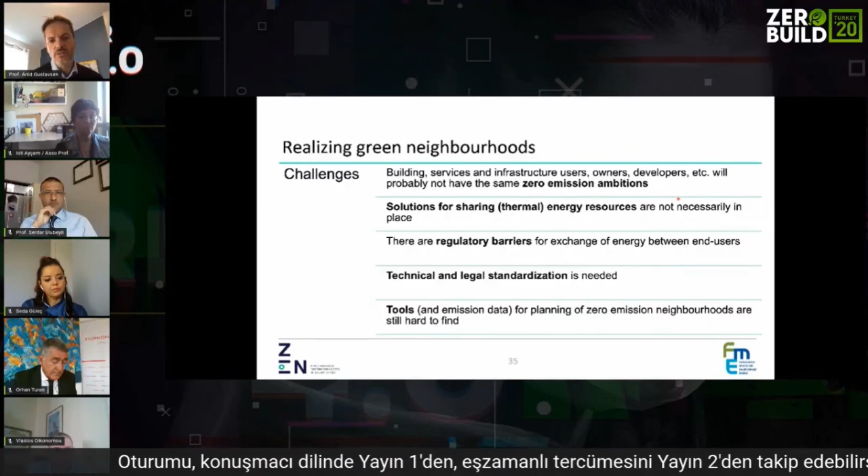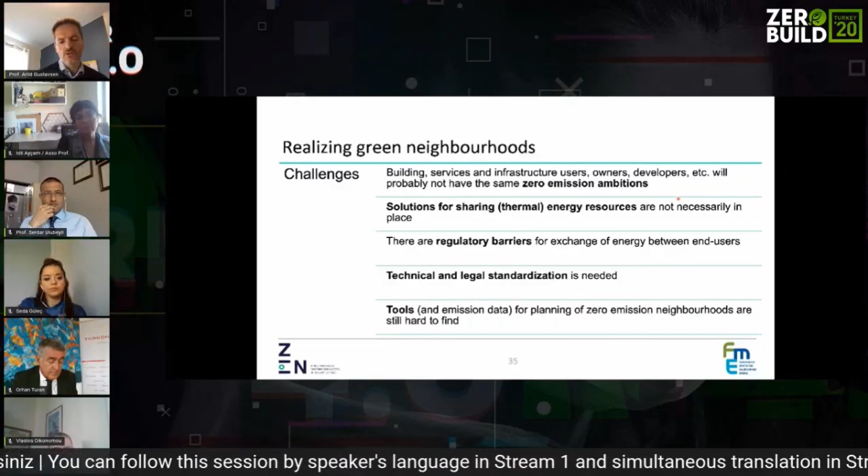Also, the tools, for instance for calculating the greenhouse gas emissions, are not easy - the tools for this are not easily available at the moment. We start to get a lot of data for buildings, but for infrastructure and energy systems it's still lacking to a certain extent.

But at the same time, there are a lot of opportunities. We can optimize the energy use and renewable energy production among different buildings and also towards the energy system. Focusing on the neighborhood instead of individual buildings makes sure emissions related to infrastructure, like grids, are also considered.

Technologies for water, sewage, waste, and mobility are also considered. So it's not only the building, but also the infrastructure connecting the buildings that is taken into account.

Installation of new renewable energy technologies can be easier than limiting it only to the building itself. And working with a neighborhood, we also get easier access to a group of people - the people living in the neighborhood.

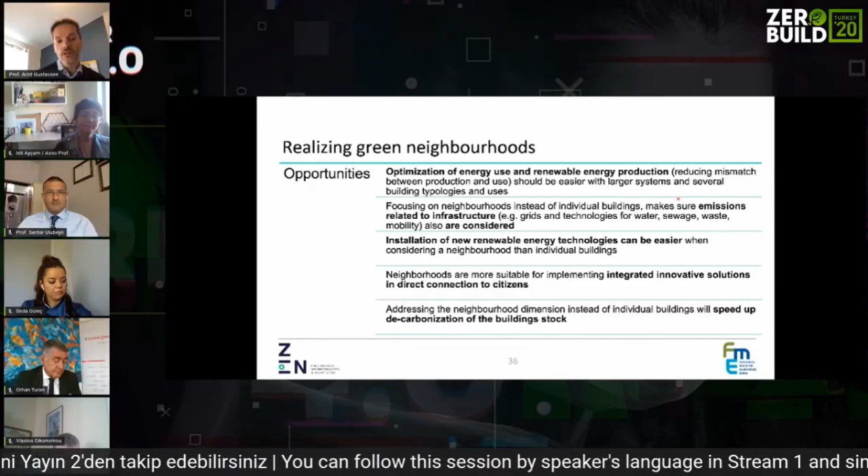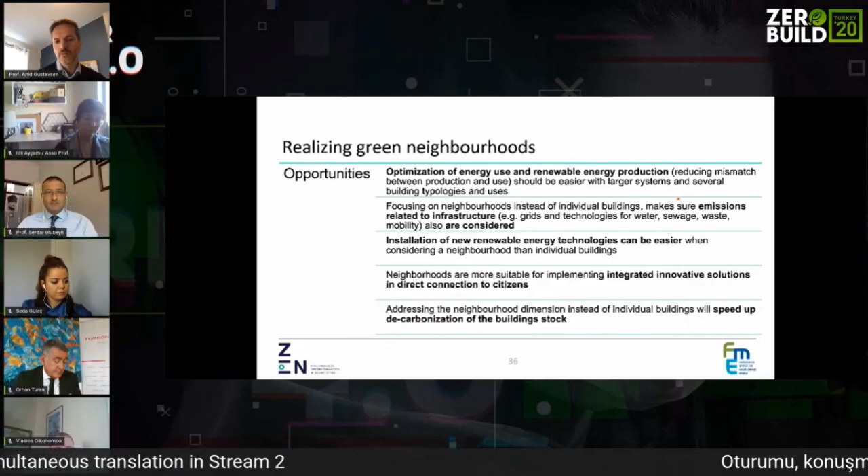Finally, addressing the neighborhood scale instead of individual buildings can make it possible to speed up the decarbonization of the building stock, which is really needed. But as I said, there are also some challenges, so we need to work on those to overcome and manage the transition to a more sustainable built environment. That was the last slide, so thank you.